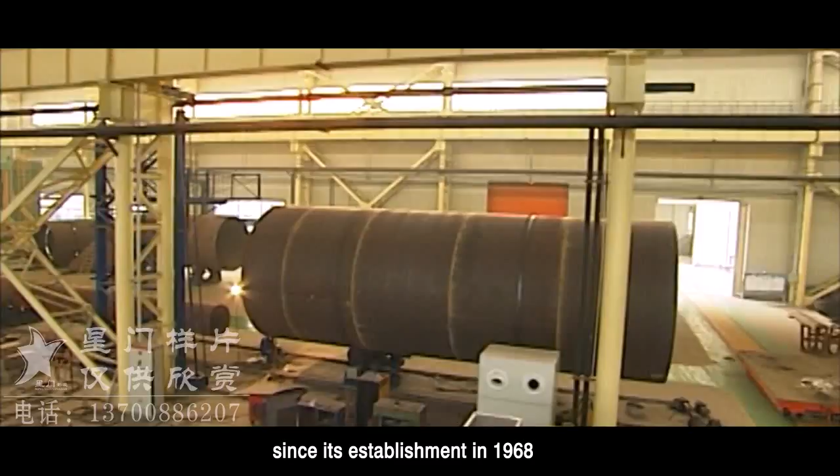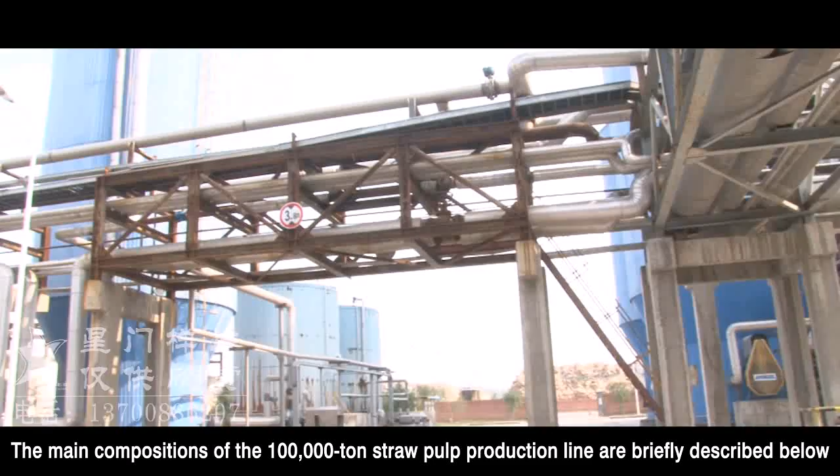The company has designed more than 10 pulping production lines in China and other countries, and established a quality reputation in the paper industry based on the product quality first and customer-centric philosophy over the past 46 years of engagement in chemical pulping. The main compositions of the 100,000-ton straw pulp production line are briefly described below.

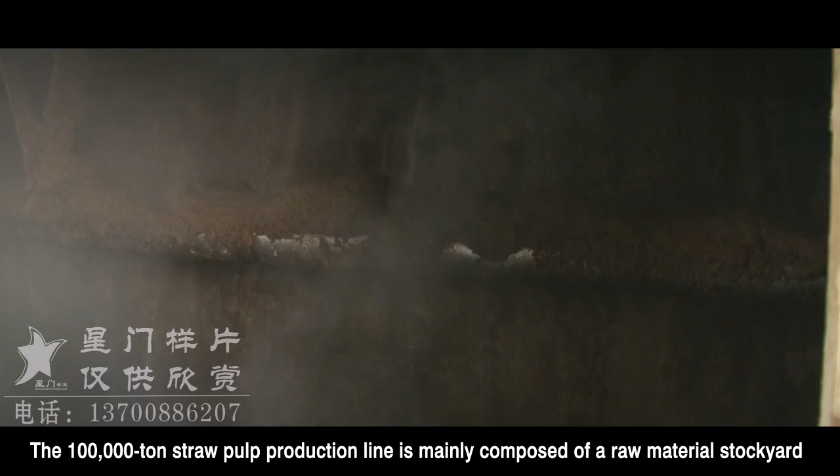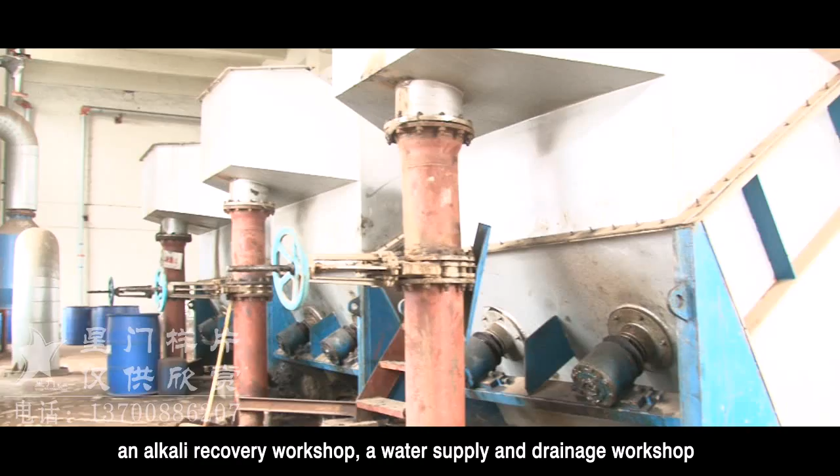The 100,000-ton straw pulp production line is mainly composed of a raw material stockyard, a pulping workshop, a washing workshop, a bleaching workshop, a paper-making workshop, an alkali recovery workshop, a water supply and drainage workshop, a sewage treatment workshop, etc. The general information and the technical scheme for reference of main contents of all the workshops are described as follows.

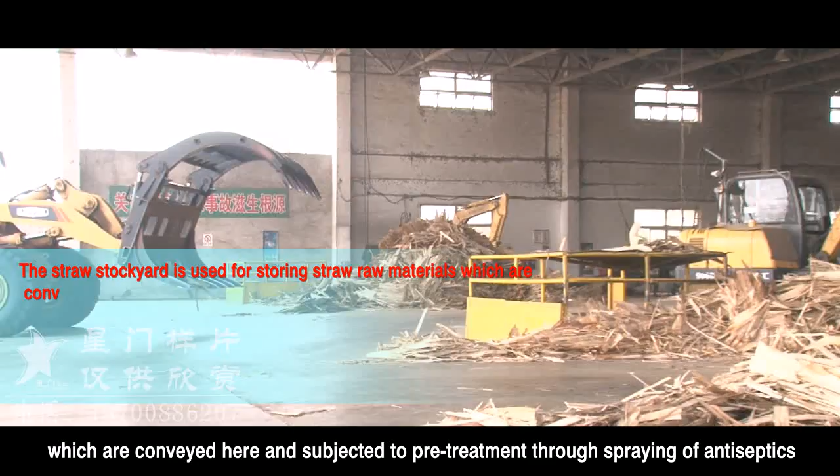A. Raw material stockyard. The straw stockyard is used for storing straw raw materials, which are conveyed here and subjected to pre-treatment through spraying of antiseptics. Straw bales are stored by using dry stacking.

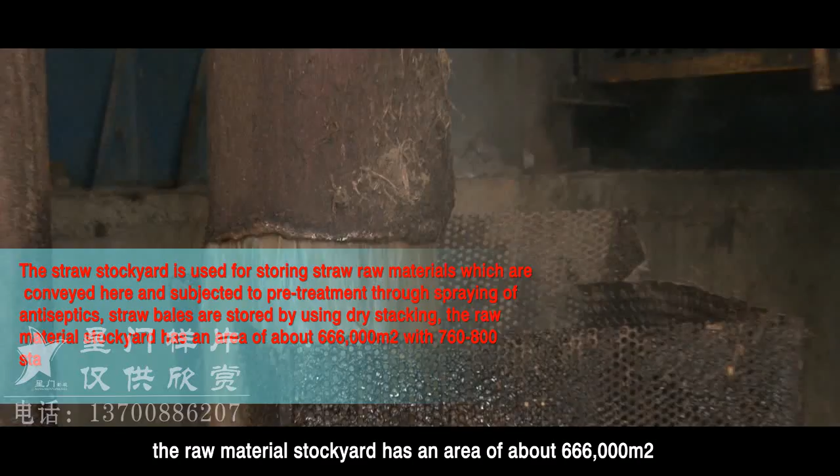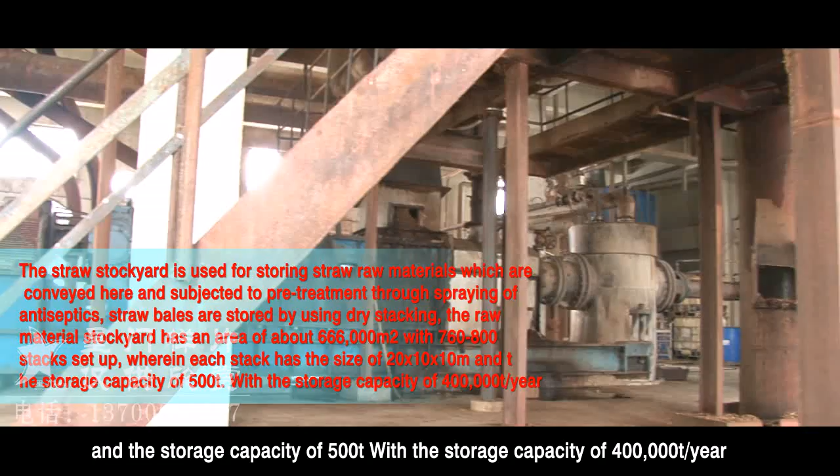The raw material stockyard has an area of about 666,000 square meters, with 760 to 800 stacks set up, wherein each stack has the size of 20 by 10 by 10 meters and the storage capacity of 500 tons, with a storage capacity of 400,000 tons per year. The raw material stockyard can meet the factory needs of raw materials for 1 year.

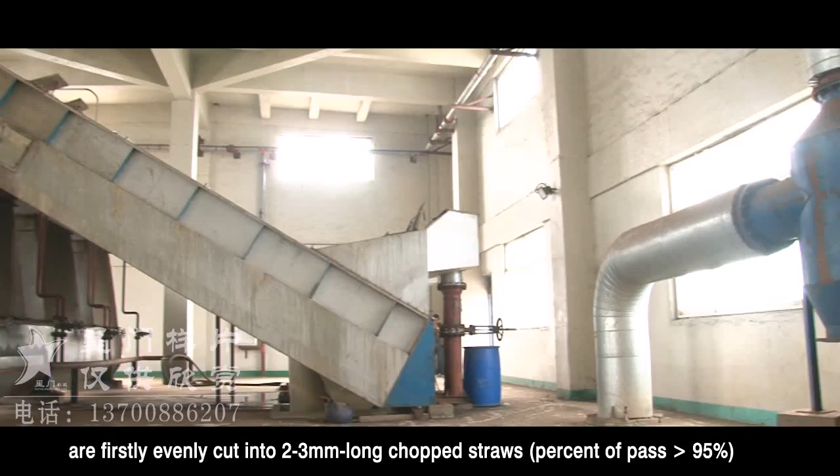Straws taken from the raw material stockyard are firstly evenly cut into 2 to 3 millimeters long chopped straws, with a percent of pass bigger than 95%, by a straw cutter at the stock preparation section, and are then sent to the digestion section.

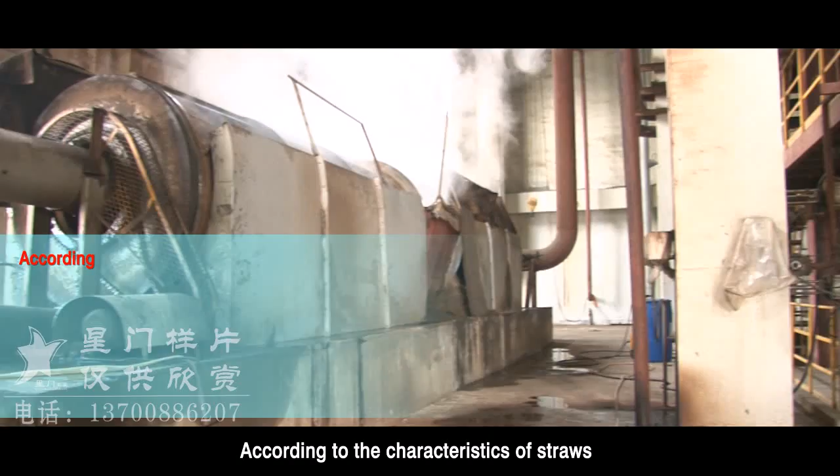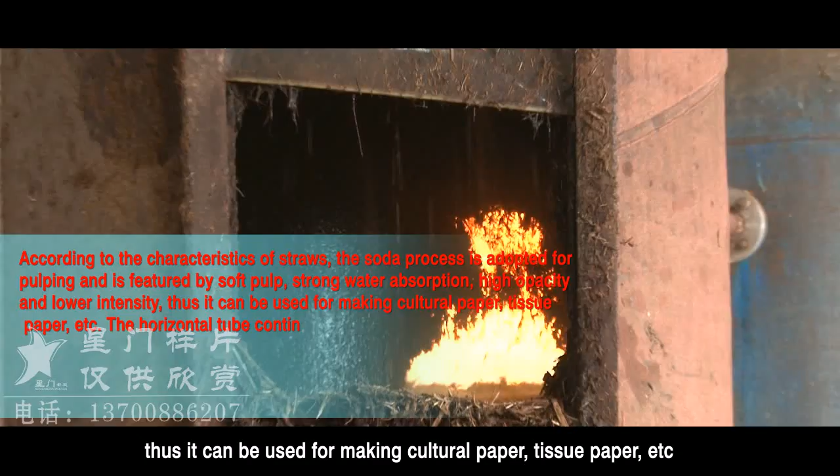B. Digestion workshop. According to the characteristics of straws, the soda process is adopted for pulping and is featured by soft pulp, strong water absorption, high opacity, and lower intensity. Thus, it can be used for making cultural paper, tissue paper, etc.

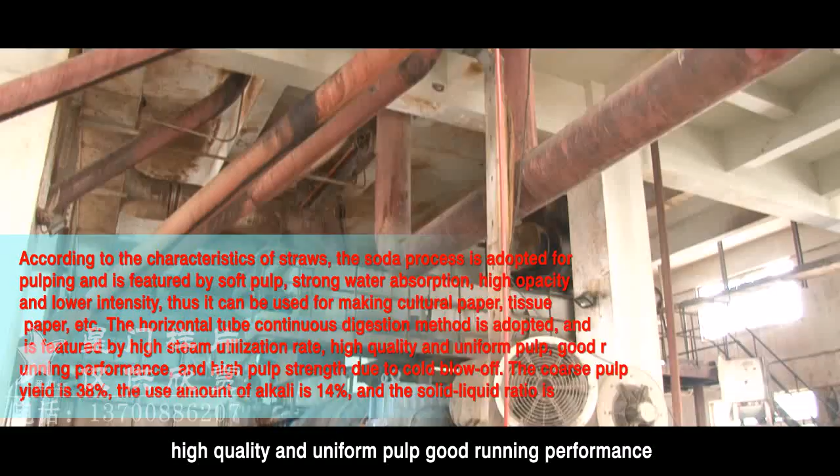The horizontal tube continuous digestion method is adopted and is featured by high steam utilization rate, high quality and uniform pulp, good running performance, and high pulp strength due to cold blow-off. The coarse pulp yield is 38%. The use amount of alkali is 14%, and the solid-liquid ratio is 1:3.

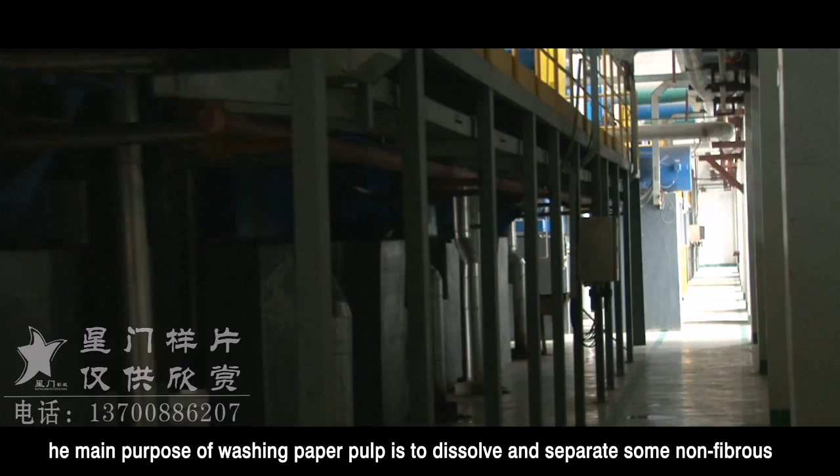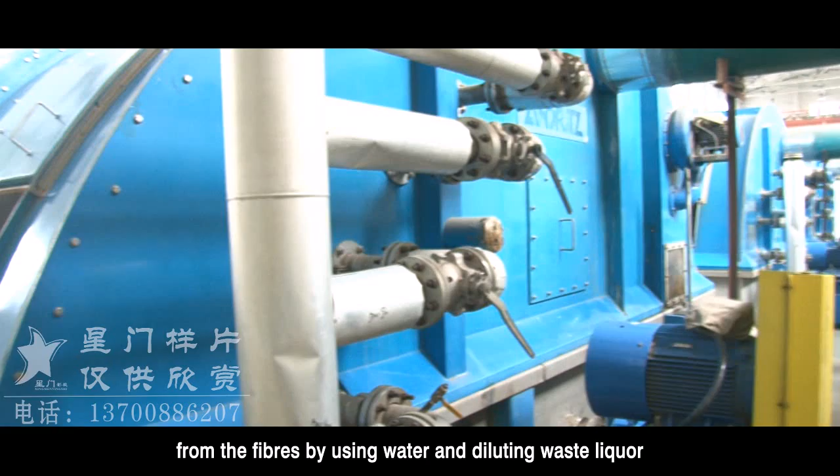C. Washing workshop. The main purpose of washing paper pulp is to dissolve and separate some non-fibrous, soluble matters which are dissolved in the digestion liquor, adhere to the surface of fibers, and are included among fibers in the digestion process from the fibers by using water and diluting waste liquor, so as to obtain clean paper pulp.

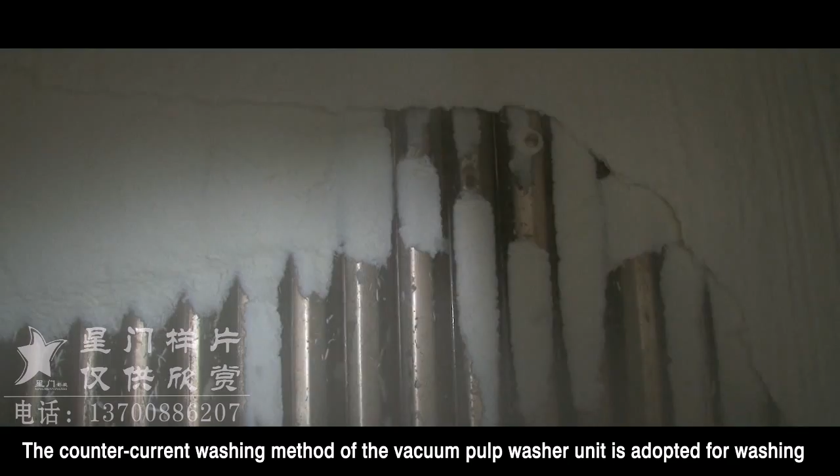And chemicals in the digestion waste liquor are recovered and black liquor is extracted. The countercurrent washing method of the vacuum pulp washer unit is adopted for washing, with a black liquor extraction rate of 90%.

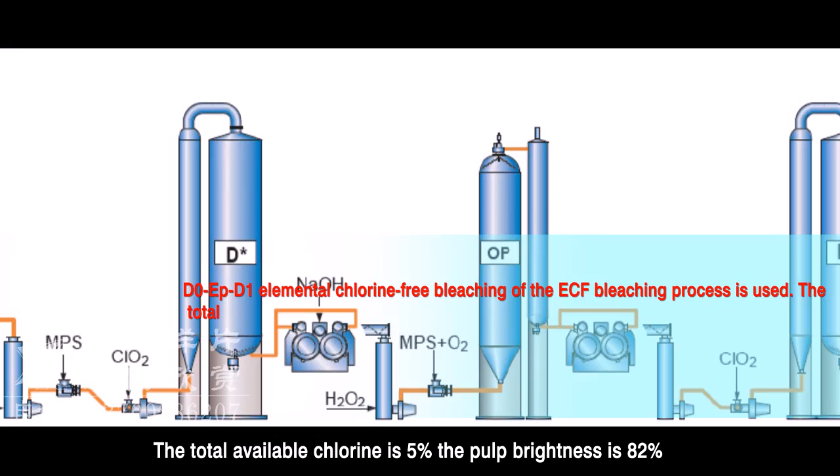D. Bleaching section. D0-EP-D1 elemental chlorine-free bleaching of the ECF bleaching process is used. The total available chlorine is 5%. The pulp brightness is 82%. Hydrogen peroxide accounts for 0.3%, and magnesium sulfate accounts for 0.3%.

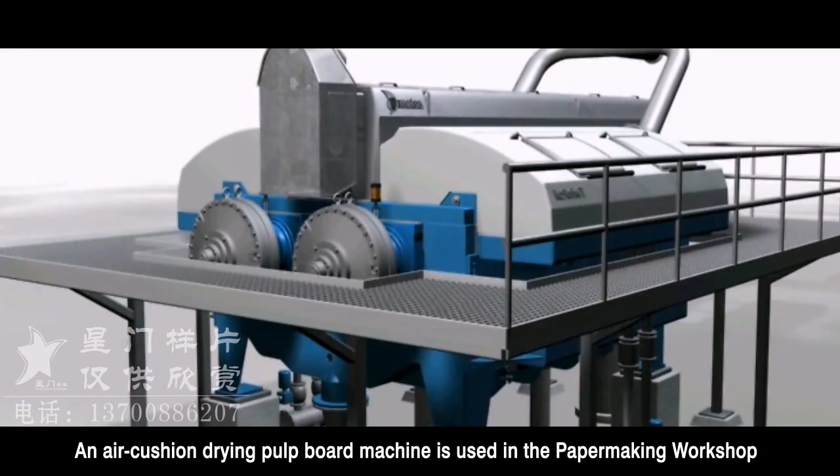E. Paper-making workshop. An air cushion drying pulp board machine is used in the paper-making workshop and has the advantages of high drying efficiency, less consumption of steam compared to that of the dryer cylinder, etc.

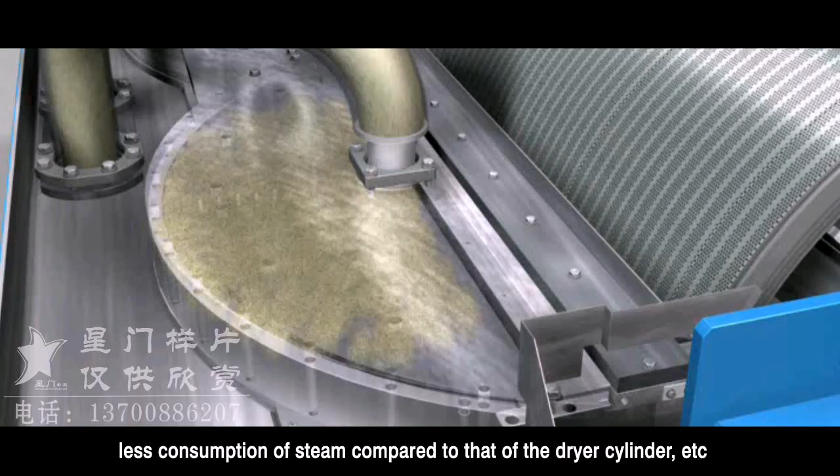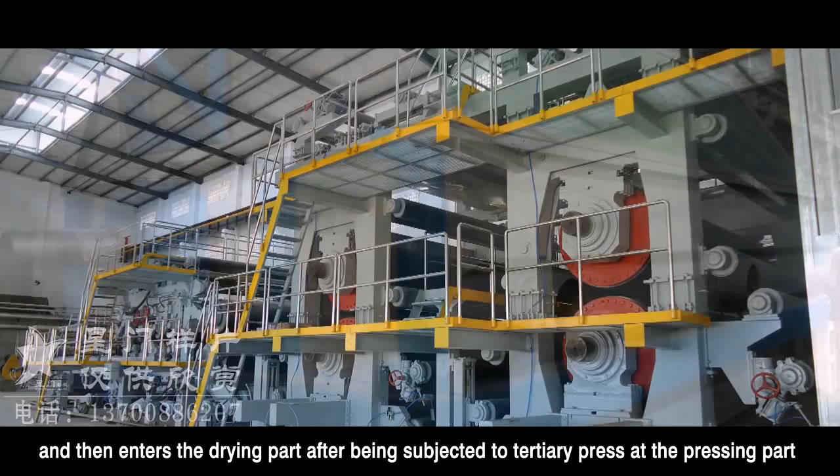The selected paper pulp flows through the head box and is dehydrated through the wire cloth part to form a wet web, and then enters the drying part after being subjected to tertiary press at the pressing part. And a dried pulp board is cut into pulp boards with a size of 800 by 600 millimeters,

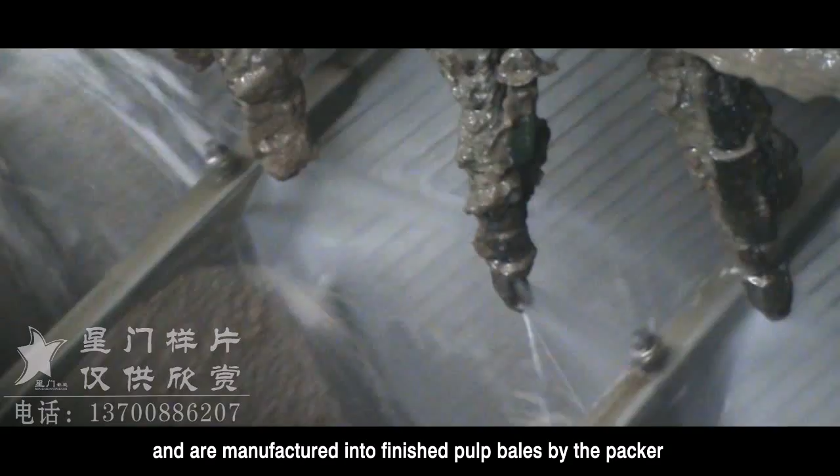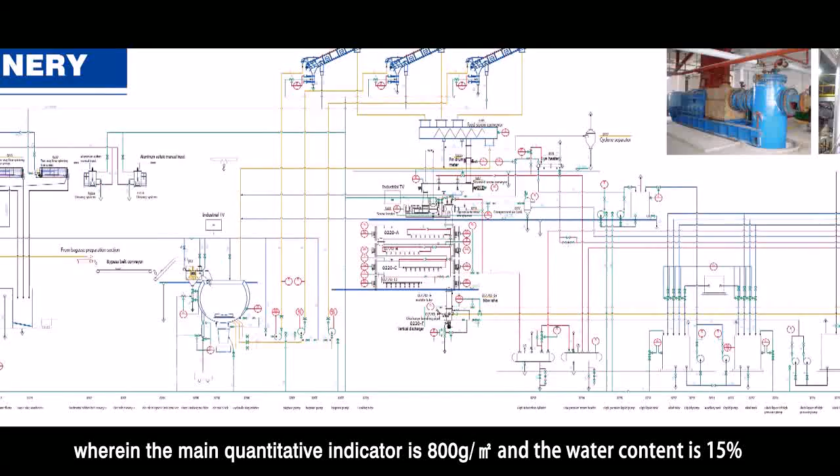which enter the automatic packing line and are manufactured into finished pulp bales by the packer and the baler and sent to the finished product warehouse, wherein the main quantitative indicator is 800 grams per square meter, and the water content is 15%.

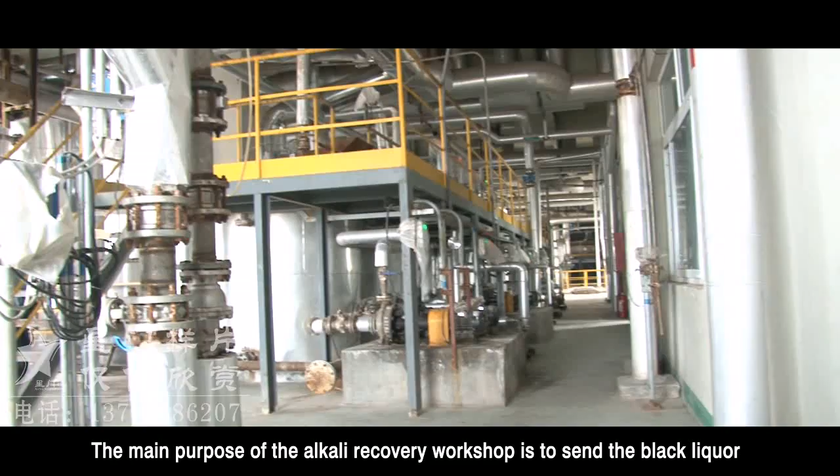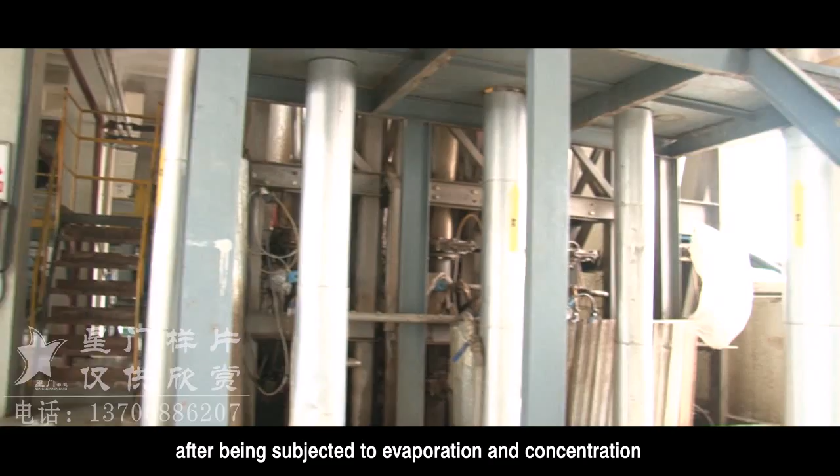F. Alkali Recovery Workshop. The main purpose of the Alkali Recovery Workshop is to send the black liquor extracted in the pulping workshop to the alkali recovery boiler to be combusted after being subjected to evaporation and concentration, to recover part of the heat energy while making organic matters in the black liquor be converted into carbon dioxide and water.

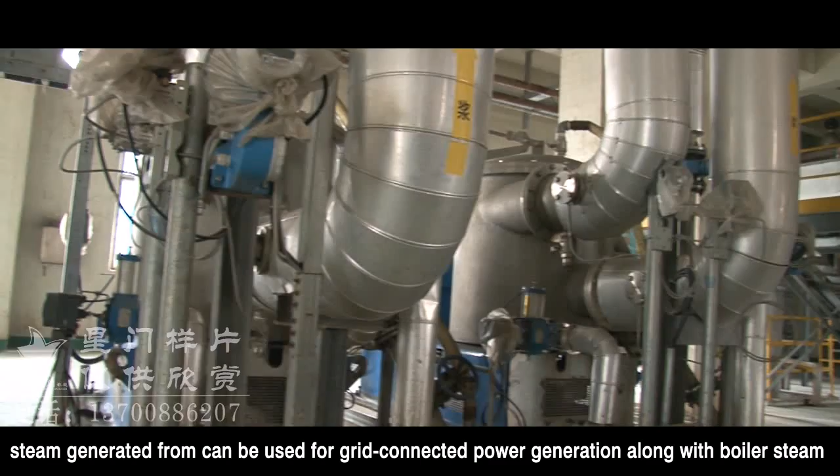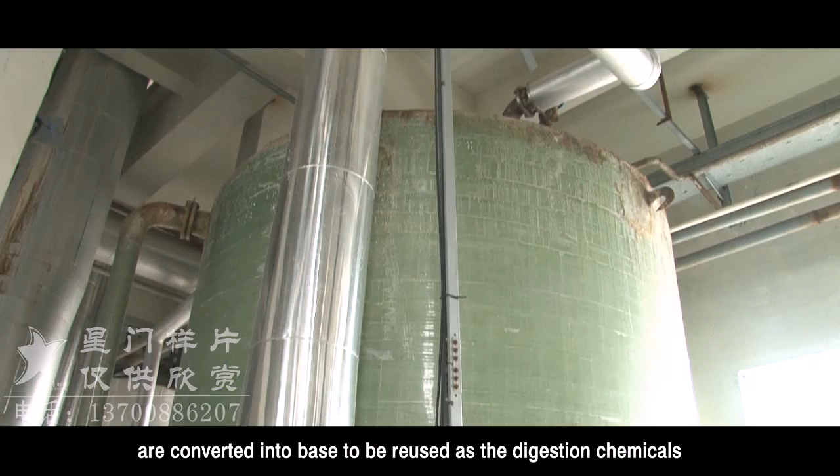Steam generated can be used for grid-connected power generation along with boiler steam, and the organic matters in the black liquor are converted into base to be reused as the digestion chemicals. According to the characteristics of straws, the annual amount of recovered alkali is 25,613 tons, and the alkali recovery rate is 85%.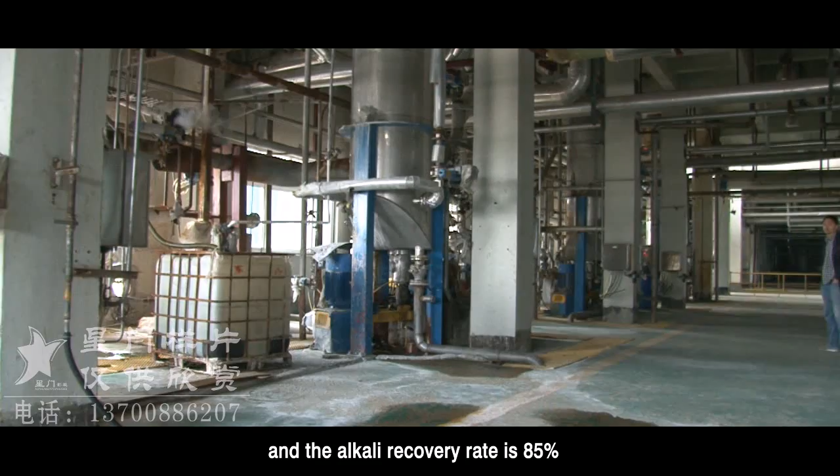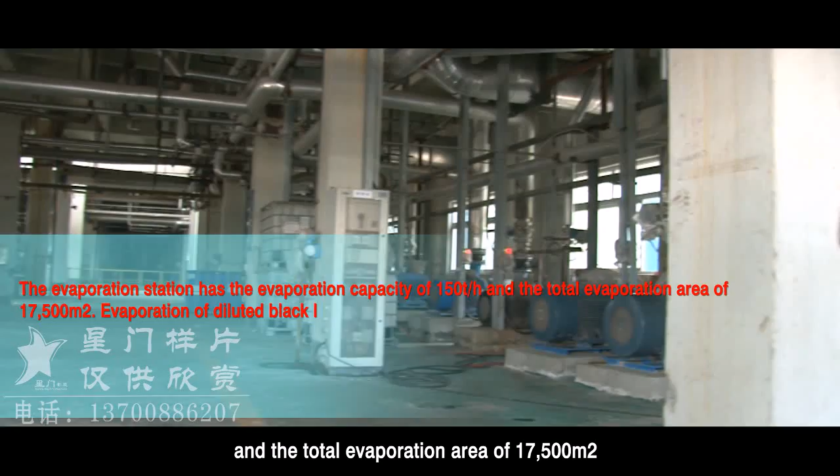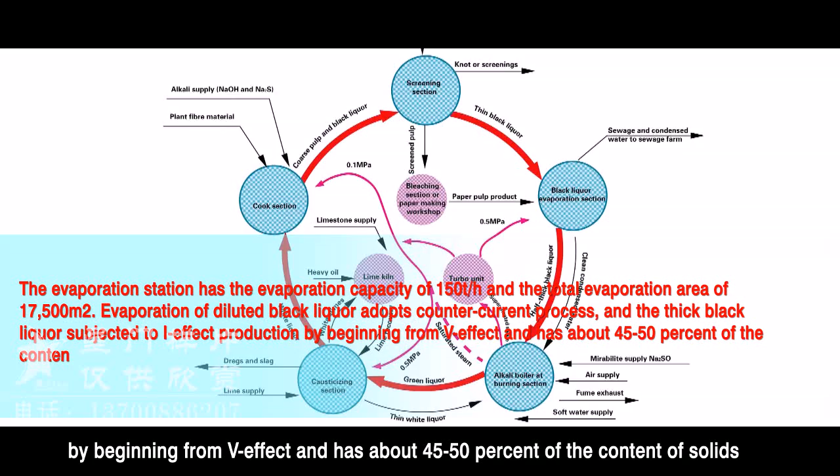The evaporation station has an evaporation capacity of 150 tons per hour and a total evaporation area of 17,500 square meters. Evaporation of diluted black liquor adopts a countercurrent process, and the thick black liquor subjected to I effect production, beginning from V effect, with about 45 to 50% solids content, is sent to the combustion section.

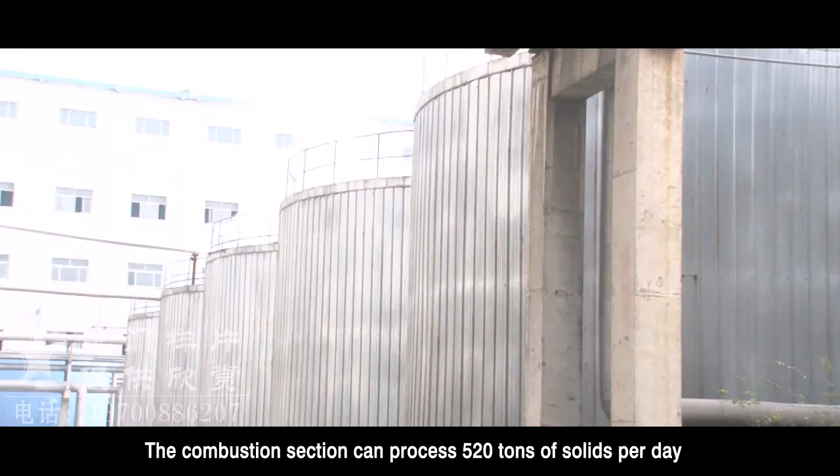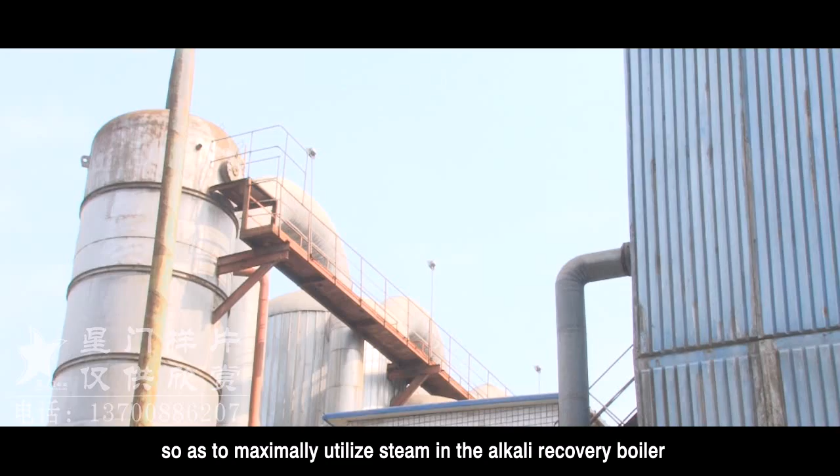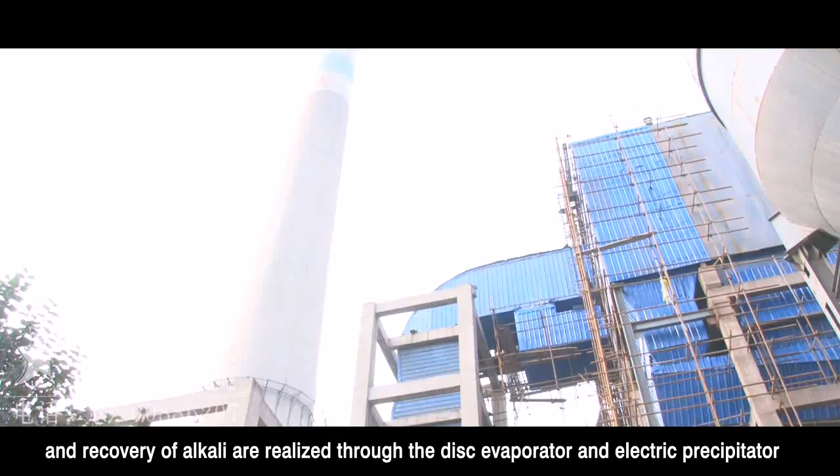The combustion section can process 520 tons of solids per day and adopts a medium pressure alkali recovery boiler with steam parameters of 3.82 megapascal and a temperature of 450 degrees, so as to maximally utilize steam in the alkali recovery boiler to generate more electric power under the premises of economy and reasonableness. Removal of alkali dust in the flue gas of the alkali recovery boiler and recovery of alkali are realized through the disc evaporator

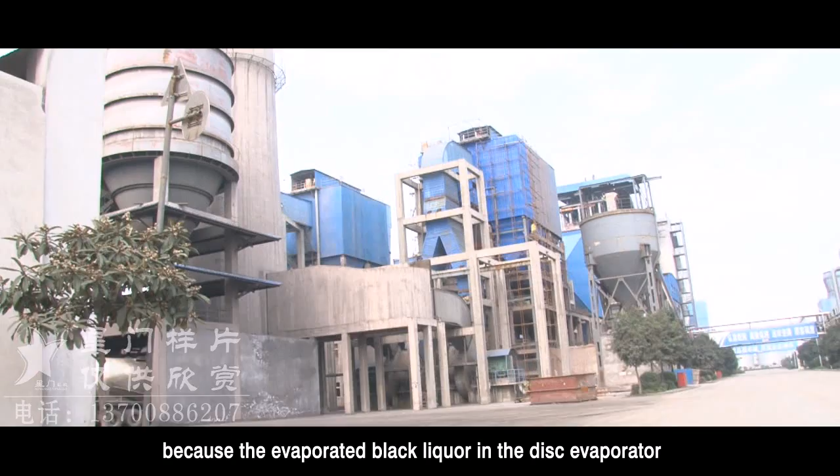and electric precipitator. The air supply adopts the tertiary air supply system because the evaporated black liquor in the disc evaporator is concentrated to 50 to 55% after being directly heated and evaporated and then enters the boiler. The combustion requirements can be met if the temperature of the primary or secondary air heating is up to 170 to 180 degrees, and the tertiary air supply adopts inlet air at room temperature.

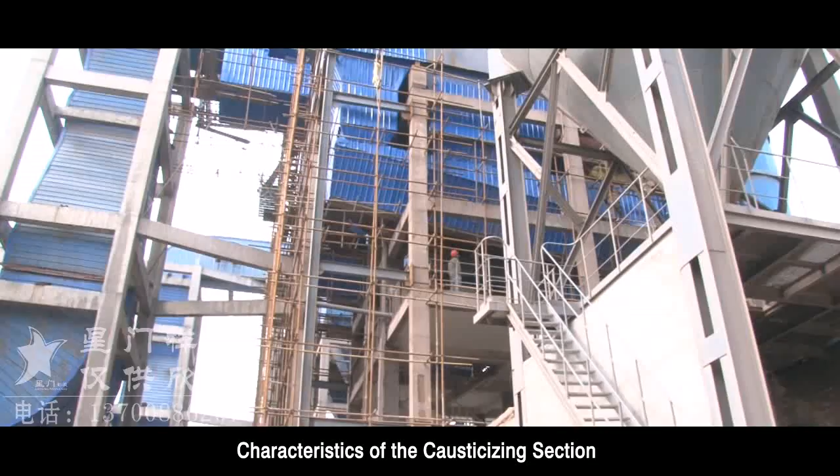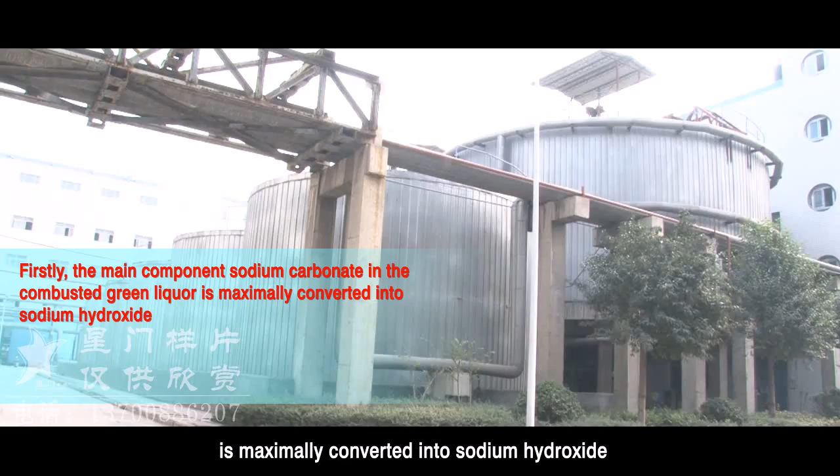Characteristics of the causticizing section. Firstly, the main component sodium carbonate in the combusted green liquor is maximally converted into sodium hydroxide. Secondly, white liquor with concentration and clarity meeting the digestion requirements is produced, and thirdly, the amount of alkali in white mud can be reduced to the maximum.

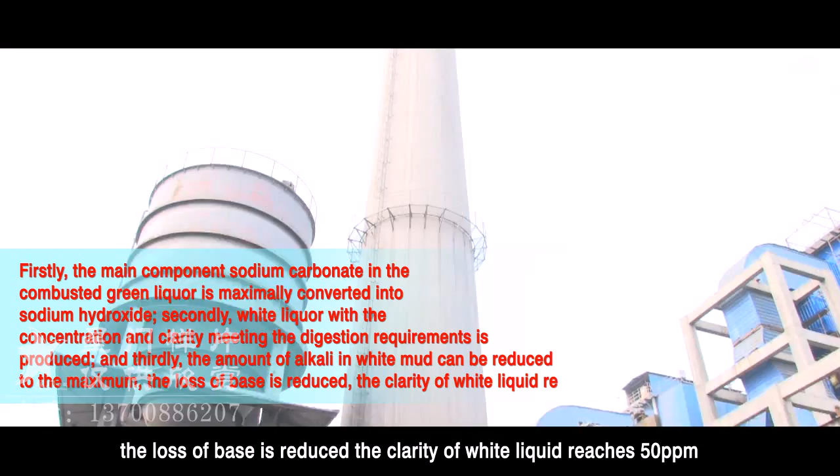The loss of base is reduced. The clarity of white liquor reaches 50 ppm. The residual alkali in white mud is less than 1%, and meanwhile, the degree of dryness of the white mud after being washed is above 65%. Water supply and drainage. Water supply of 35,000 cubic meters per day.

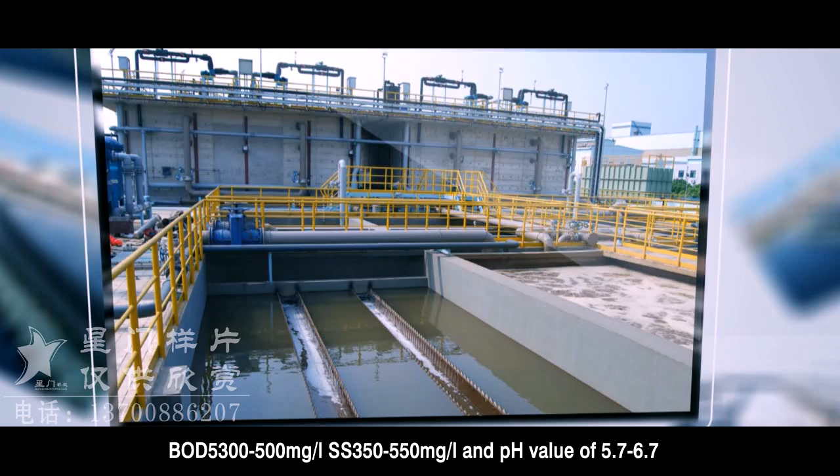Sewage treatment. The indicators of sewage required to be treated are CODcr 1,000 to 1,200 milligrams per liter, BOD5 300 to 500 milligrams per liter, SS 350 to 550 milligrams per liter, and a pH value of 5.7 to 6.7. The daily sewage treatment capacity is 25,000 cubic meters per day.

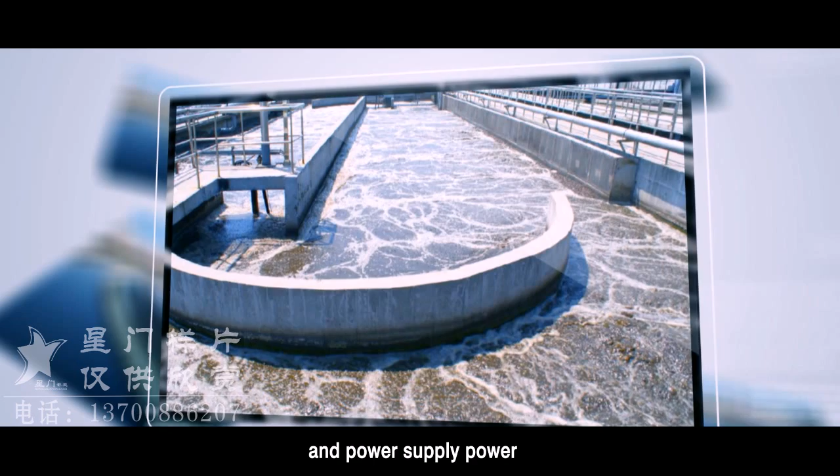Egypt's straws are very rich and can be made into pulp boards after being subjected to chemical pulping, which then can be sold to papermaking factories. Both favorable economic benefits and social benefits can be achieved, wherein the economic benefits can be manifested in the creation of economic value, and social benefits in increased employment opportunities and environmental optimization instead of combustion of straws causing pollution to the environment. Thus, this project is worthy of investment.